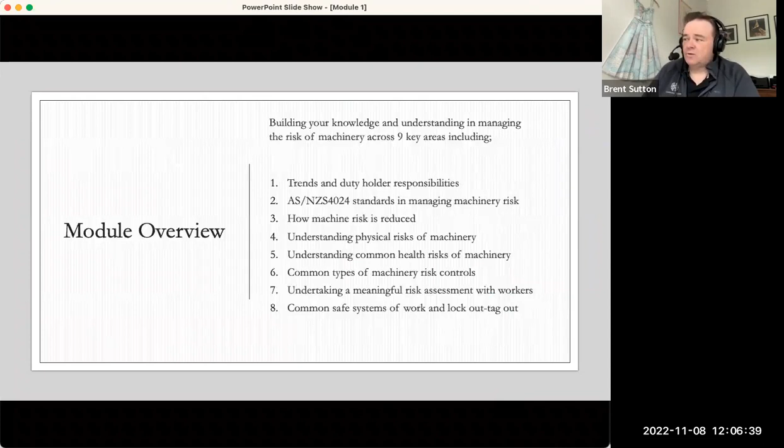And we're going to cover this across 8 different modules. And today's module is we're going to explore trends of machinery harm. We're going to be looking at the life cycle of machinery and also around the duties and responsibility of duty holders itself. I'm not going to try and make it too boring around the duty holder responsibilities. But I think there's a really interesting conversation to be had about the new plant and structures regulations that are coming in.

So what do we know? The fact is this, that we've had in legislation since 1950, legislation that is specific around machinery safety. And the Machinery Act of 1950 got repealed in 2015. So from 2015 until 2023, there has been an absence of regulation around machinery, which I think is quite disappointing. And even if I look back to what the Act of 1950 said, a lot of those things are still very reflective of today and what people are facing. I think what has changed is the growth in the area of automation.

And in a later part of this webinar series, we'll be exploring the different types of risks that exist in automation versus a lot of the current manual interfaces between people and plant. For whatever reason, we actually think that automated machinery is safer. I would challenge you that automated machinery is able to exert much higher levels of harm. I think it's the opportunity of harm that is different.

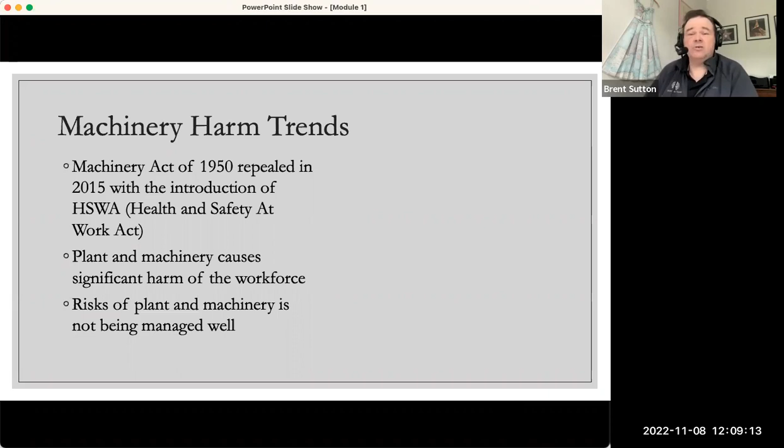And the fact is that plant and machinery still continues to be a major contributor to harm in this country. And if we look at the prosecutions that are going through the courts, probably 65 to 70% of those prosecutions are around machinery. Yet the causes of those things are still very much similar. And that leads me to the conclusion that our risk management of plant and machinery is still not being managed well. So here's the good news. There is a great opportunity for us to do better.

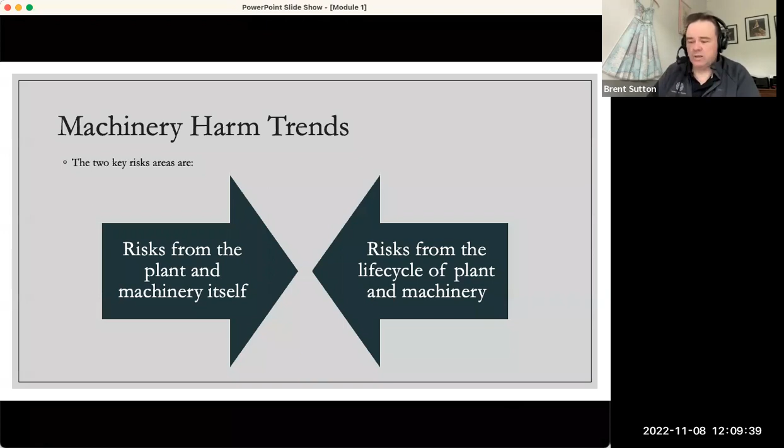And when we think about machinery harm, there are really two trends. There's the trend coming from the risks from the plant and machinery itself. And there's also the risks that come from the life cycle of that plant and machinery. So let's explore the risks from the plant and machinery itself. So these are the top 6 items that are featured in prosecutions.

Shockingly, workers still being able to reach into dangerous parts of the machine. And when we think about reach, I want you to think in your head about the human, think about the ergonomics of the human. Think about people reaching through, people reaching over, people reaching under, and people reaching around into machinery.

The second highest thing was guards not securely fastened or easily removable. I still see stuff being taped down. I still see guarding with wing nuts. I recently saw some interlocks that were held together with bungee cords and straps. None of those things are fixings. Things that fix guards are things that need to be permanent by their nature, not temporary.

So the third component was opening of the guards. In other words, the guard wasn't preventing the total reach into that danger zone. So when you think about that, think about the gap that exists. And for example, a gap of about 6 millimeters can allow a finger to enter. A gap of 20 mil can allow a hand and part of the arm to enter. Or a gap of 180 mil can actually allow a whole body to enter.

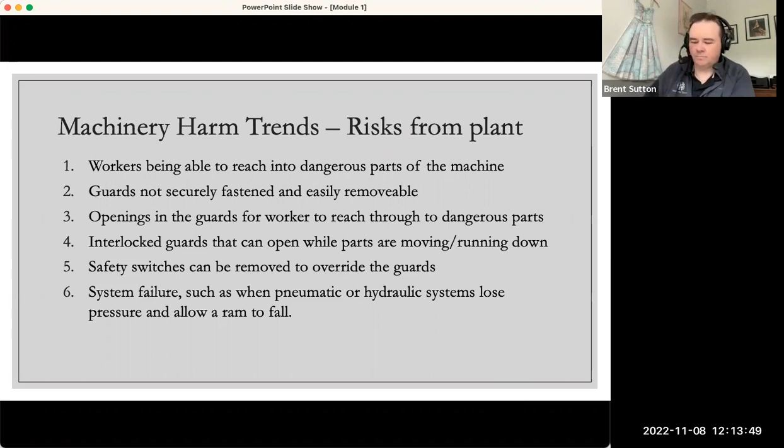The life cycle of machinery is always fascinating because what WorkSafe are trying to do is they're basically trying to share with us that the risks around machinery change during the life cycle of that machine. And that life cycle can be everything from the design, procurement, and due diligence, all the way down to the storage and the decommissioning of that machine.

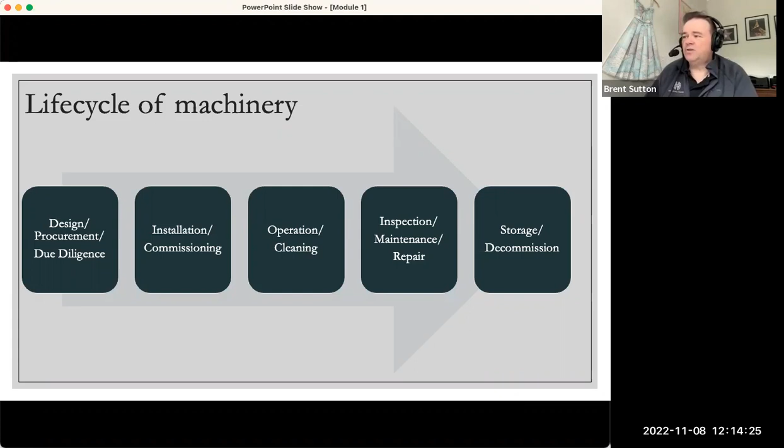In my view, the most common ones that I see really sit into these 4 main phases. So the setup and adjustment component for the machine, in other words, the things that we do prior to the operation of the machine, the different types of hazards and risks that are present during the running of the machine, and the different types of hazards and risks that are present when we're trying to clean the machines. And the last one, the different types of risks that are present when we're trying to clear jams or fix the machine on the fly.

And when I say fixing, I'm not really talking there about general maintenance. I'm talking there about having to make adjustments or changes, particularly with older machines. So that machine may have a particular set of hazards, but across those 4 modes, those hazards will be present at different times, and the potential for those hazards to cause harm will also change during those modes as well.

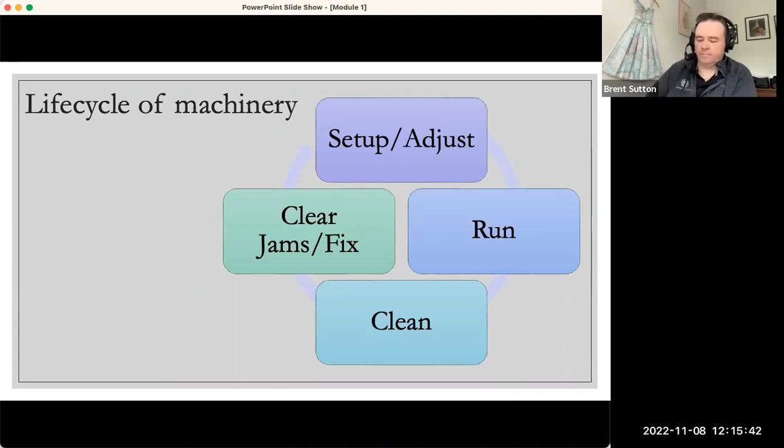And when we look at the type of things that are coming through around those prosecutions around the life cycle, workers are able to remove guards for maintenance and not replace them. Interlock guards can be open while parts are still moving, particularly around cleaning. The 4th one, which comes as a surprise, but sadly I've seen it before, is that interlock guards are used as a shortcut to start the machine.

So if we think about that, an interlock guard should perform the same function as an emergency stop. So when that guard is removed, it should initiate an emergency stop, meaning that the machine cannot be restarted until that stop function is reactivated and the control panel comes back online. What I see quite often is that some of these features are actually initiating a pause on the machine rather than an emergency stop.

And the next one is the over-reliance on lockout tagout. I don't think there's any shortage of New Zealand organisations with a lockout tagout procedure. I think there's a really big difference when lockout tagout is used for routine operations versus non-routine operations. There continues to be an over-reliance on lockout tagout being used for cleaning of machinery.

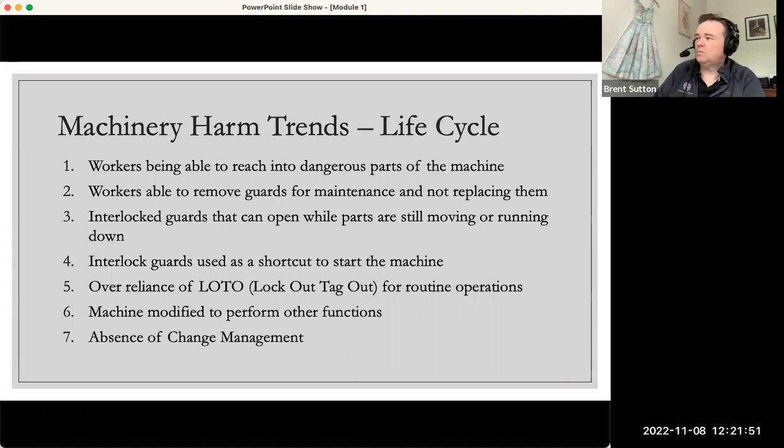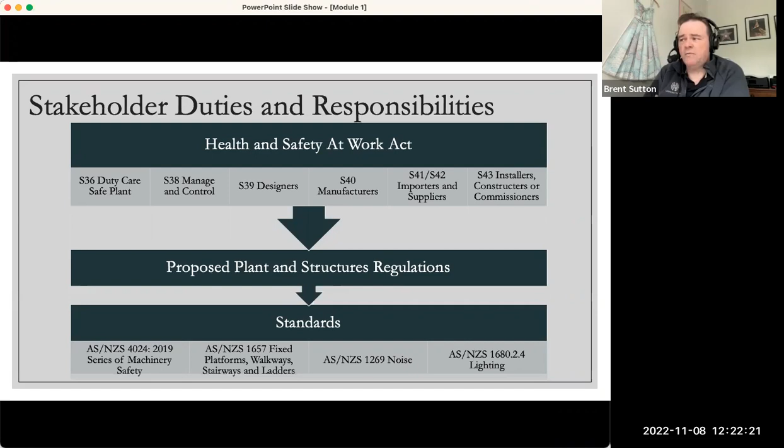All of these things are underpinned by our legislation. And as it stands at the moment, there are a series of duties in the Act itself. And the notion of what is reasonably practicable at the moment is very much driven by the joint Australian and New Zealand standards called AS/NZS 4024. So let's explore some of those things.

The Health and Safety at Work Act makes it very clear that as part of a supply chain arrangement, different parties in that supply chain have a duty to ensure that the machine is made safe for its intended use, and that they provide relevant information to the PCBUs that are going to buy the machine or use the machine around its safe use.

I don't know about you, but I am yet to see anyone who designs, anyone who manufactures, anyone who imports or supplies, I have yet to see any of those people being prosecuted. At the moment, it is the people that manage or control the plant and machinery that are being prosecuted. I don't know why. I think it's way overdue,

because what I observe is that there is a disparity between small businesses and large business around machinery safety. Small businesses are totally reliant on the supplier or the installer or the commissioner of that machine to make sure that machine is safe. And I've even seen it to the extent where these organizations have issued certificates to companies to say that the machine has met AS 4024. Yet in a short space of time, a worker has been harmed as a result.

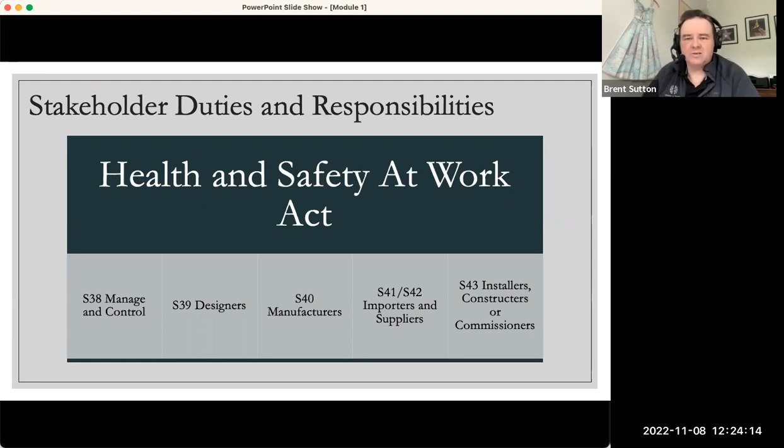WorkSafe are looking to effect change in this space, and there are the proposed plant and structures regulations that are before Cabinet at the moment. And my last update, which was about 10 days ago, is that we're expecting to see those regulations come into play early next year. Well, what does that mean?

Well, I think the good news is that the plant and structures regulations will provide much better clarity for organizations around what is expected of them. The other good news is those proposed changes around the plant, particularly around machinery, are consistent with the joint New Zealand Australian standards of 4024. So if you've got machinery now and you're following 4024, then these new types of regulations aren't going to be adding to you.

On the other side, these regulations allow the regulator to impose a different set of powers. So right now, if the regulator comes into your workplace and they observe something with a machine, they have a set of powers they can invoke, such as issuing improvement notices or prohibition notices. And they are more likely to prosecute as the result of an event rather than as the result of some type of normal visit. The regulations in this case are going to give the inspectors an additional power.